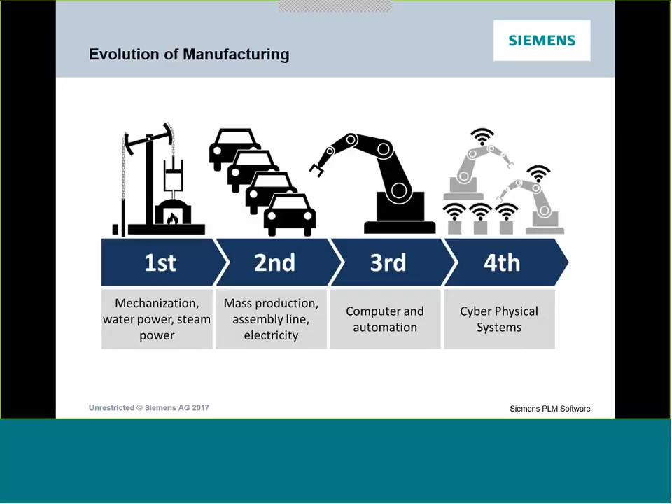This digital technology is leveling the playing field for businesses of all sizes, including small and medium-sized businesses, enabling them to disrupt their industries. It's creating opportunities to develop products and services that were once inconceivable. Size, which was once a competitive advantage, is becoming a liability as businesses that once dominated their markets are now struggling to keep up with young, nimble startups. This digital transformation is helping companies make their processes leaner, faster, and more flexible, enabling them to rapidly evolve to react to ever-changing market requirements and conditions.

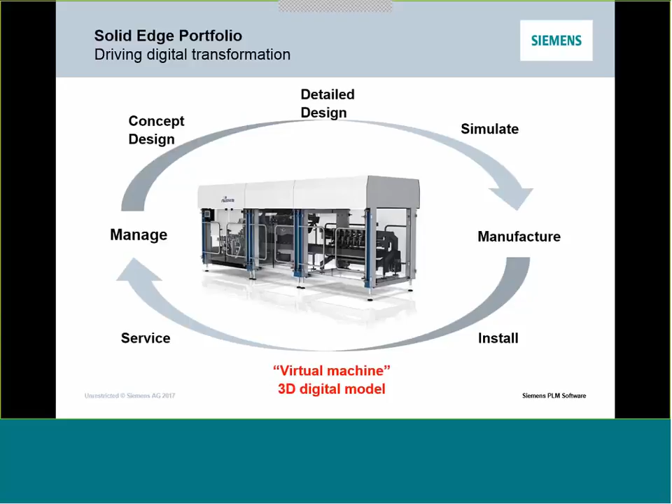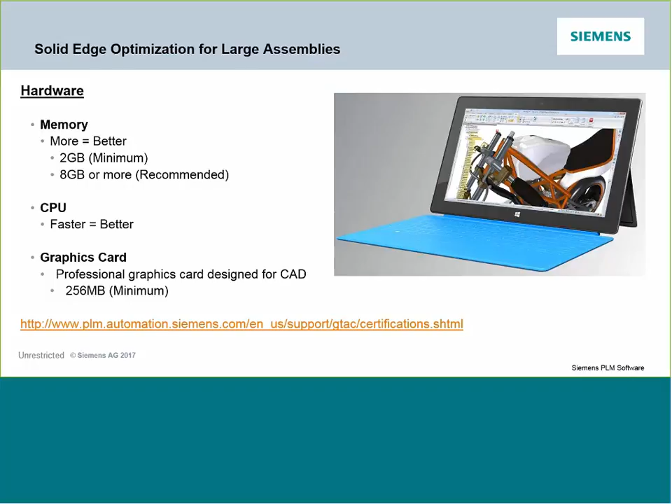Obviously, as you look here, the amount of memory you have is critically important. The more you have, the better, especially when working with larger assemblies. The faster your CPU, the better, and then also having a really good graphics card. The focus of the main demonstration is going to be talking about the ease of accessing the data that you want to work in, and that goes both for the assembly models themselves as well as the drawings.

We also want to talk about how you can work more efficiently with the tools that are built into Solid Edge, primarily by optimizing your display with built-in tools like display configurations, being able to utilize tools such as simplification, and then also things like zones where you want to work with inside of a spatial area.

Some other key things that will help you, which we won't go over too much in the demonstration itself, but being able to turn off some of the visual effects like reflections, shadows, and then changing some of the options in the View tab, such as controlling the sharpness of your display and how your views transition. And then we'll also talk a little bit about how you can maximize your memory usage by utilizing some tools such as unloading hidden parts and then inactivating parts that you're not currently working in.

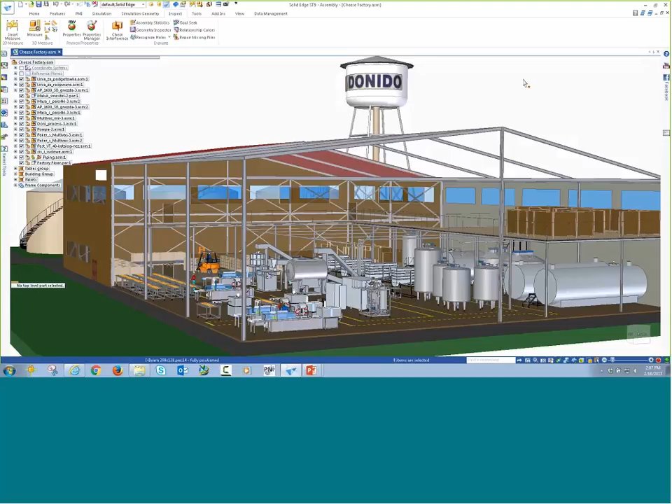With that, we're going to go into Solid Edge and talk about some of these tools. The specific assembly that we're working in, this is a plant layout, and you'll notice as I zoom out, we have a number of components here, both from the plant design as well as the shop floor. As I pull up the statistics of this particular assembly, it is about 12,500 components. And as you look here, some of the statistics that you see representing the count for the different components.

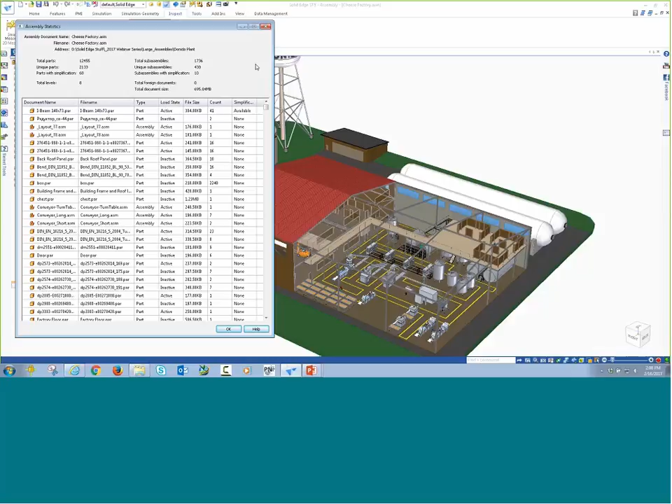But then you'll also notice that this particular assembly's total document size is just under 700 megabytes. So we are working with a very large assembly in this example. I also want to talk a little bit more about some of the built-in tools. We talked initially in the PowerPoint about accessing this data quickly. So one of the things I want to show you before we get into some of the ways that you can optimize your display is how you can access large assembly files very quickly.

So I'm going to open up this same plant layout file and show you a way that you can access it almost instantaneously. You'll notice inside of the Solid Edge options menu, we have some tools that allow the user to specify what exactly is a large assembly. So large assemblies to different customers can mean different things. It's basically a relative number.

You'll notice under the options for opening up the assembly, I can specify what represents a small assembly, in my case, 100 parts or less. A medium-sized assembly, 100 to 10,000. And then also here representing 10,000 or more components is what I deem a large assembly. And what that means is as we open up these large assemblies, we can specify some different criteria. For example, I may want to open up the assembly file itself, but not display any of the components. So you'll notice in this case I have the option for yes, for hide all the components. Again, I'll talk about the benefits of that here in just a minute.

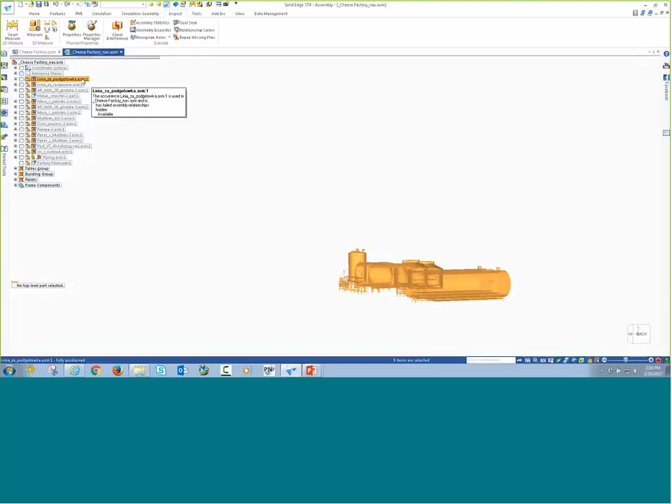When I access a large assembly file, you'll notice here that you have the ability right down here as one of the options to open the assembly as, in this case, large assembly. And you'll notice that it's going to open up this file almost instantaneously, even though we're accessing over 12,000 different components. One of the benefits that Solid Edge gives you is it gives you access to the structure of this particular assembly. And what you'll notice is as I hover my cursor around different components, it highlights exactly what components and where they are within that specific plant layout.

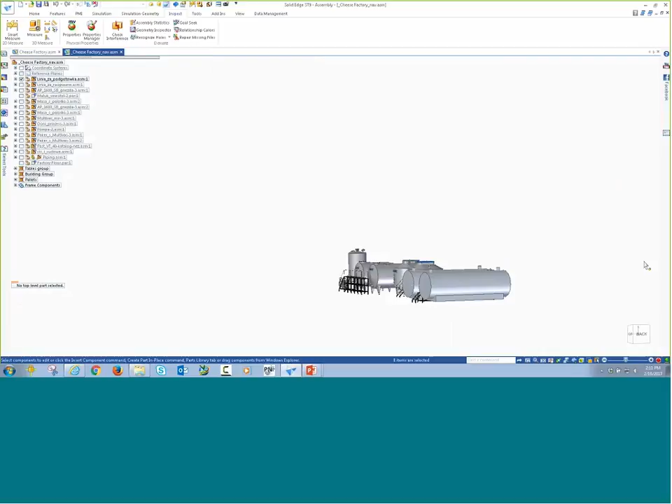So for example, if I know that I'm working within the specific area of this large assembly, I can highlight those components and choose just to show them. And that gives me access to those specific components where I don't have to sit and wait for all of the 12,000 components to load on screen. And I'm sure many of you who are on this call today have probably accessed a larger file at some point, hit File Open, and had to sit and wait for all of those components to load on screen.

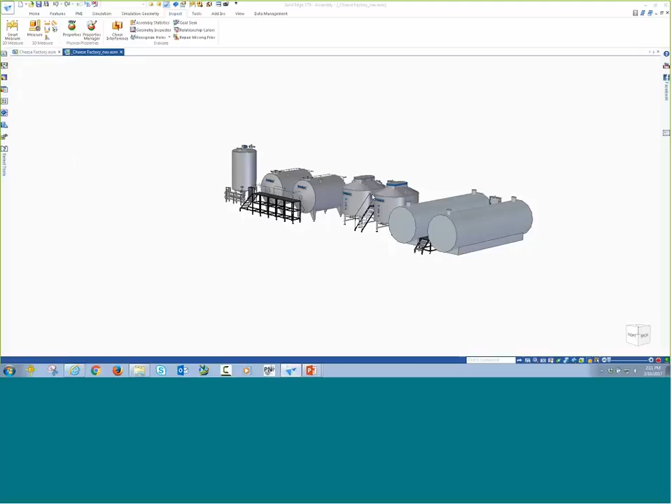This is one way that you can work more efficiently in gaining access into this large assembly. We'll go ahead and close this specific file down and go back into the previous assembly where all of the components are displayed.

I just want to talk a little bit about some of the built-in tools that allow you to work more efficiently by optimizing your display. Oftentimes when you're working within large assemblies such as this one, you don't really need to see many of the smaller components—nuts, bolts, washers, and maybe some other options. I may just want to focus in on some of the main machinery or other main components. We have built into Solid Edge a tool called Select Parts by Size.

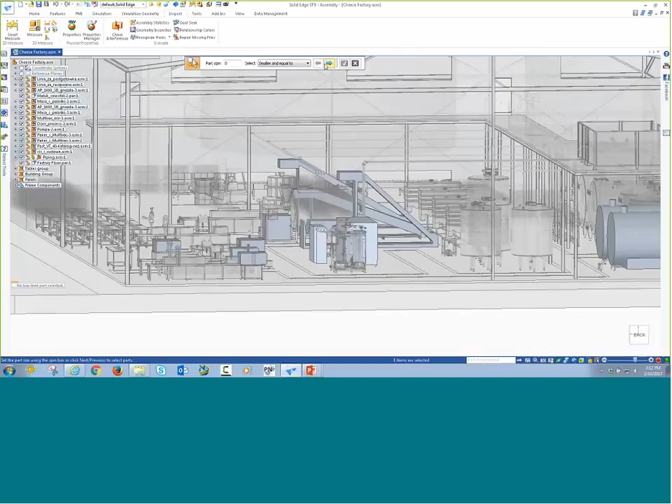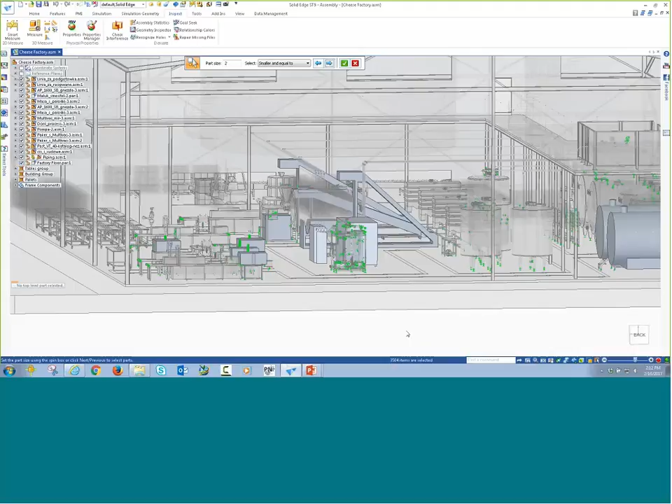With just a couple of clicks of the button, it's going to start accessing the parts based on their size. If you look closely, you'll see that we've got a number of smaller components highlighted in just a matter of seconds. If we look down here at the metrics, it shows that I've selected over 3,500 components in just a matter of seconds, and what I may want to do is just hide those.

Being able to select those very quickly and then hide them very quickly, I'll just do a right mouse click and choose to hide them from the screen. That way, that's going to increase performance as I'm working inside of a larger assembly.

We mentioned being able to access or maximize your memory usage. We also have a tool here that allows us to unload hidden parts. So those parts that I just hid, if I want to unload those from memory, that'll speed up other assembly tasks because those parts are no longer in memory. It gains me better efficiency as I'm working within the larger assembly because now those 3,500 components are no longer in memory.

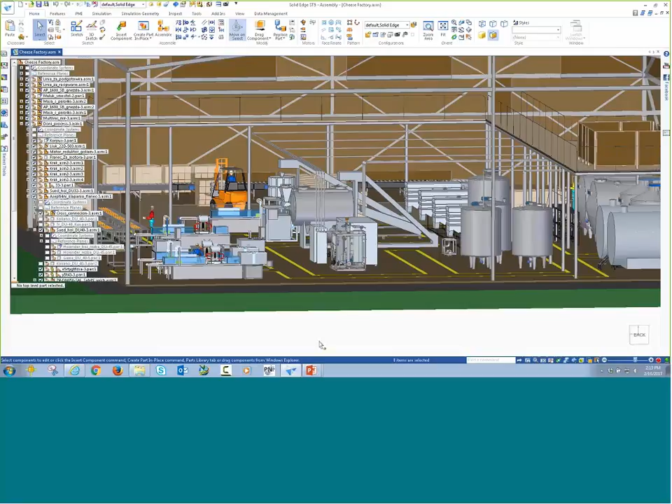Another way that you can maximize your display or increase your efficiencies is to utilize what we call display configurations. Obviously if I've been tasked to work within a certain area of this particular plant layout, I may have some other members of my team working on other areas. So we may be accessing this top level assembly and working within some of the different sub-levels, and I may just want to look at specific components.

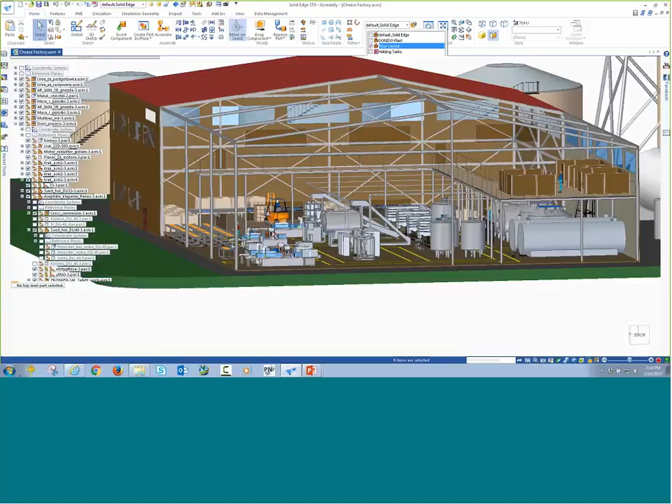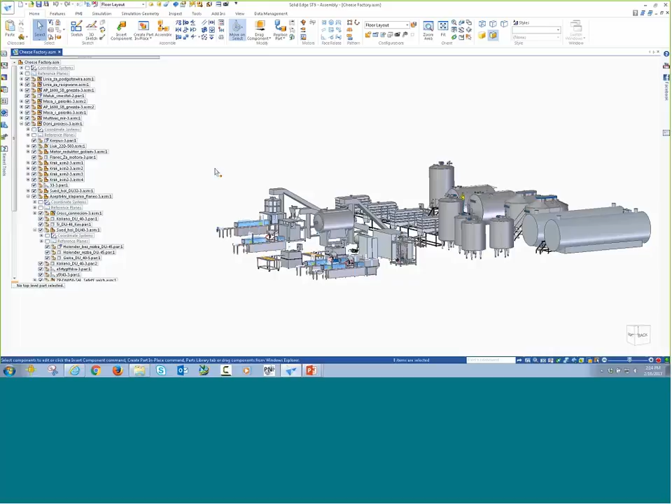I may want to just, in this example, look at the floor layout. This may just show some of the specific machinery while turning off the building structure, maybe the water towers on the outside, and allow me to just focus in on what I need to see. Display configurations allow you to focus in and create what we call saved views, giving me access to specific components without having to manually hide and show them on the left-hand side. I can save them and get access to them very, very easily.

As I zoom in on one of the areas of the floor layout, you'll notice that we have some machines represented in great detail, and others represented with a more simplified display. This is a way that you can optimize your display and gain efficiencies as you're working within these large assemblies, by creating what we call simplified versions of the assemblies.

Another nice little feature we have is being able to access where in the Pathfinder on the left-hand side a component might reside. Obviously, if we have 12,000 components listed on the left-hand side, it may become difficult to find exactly what I'm looking for.

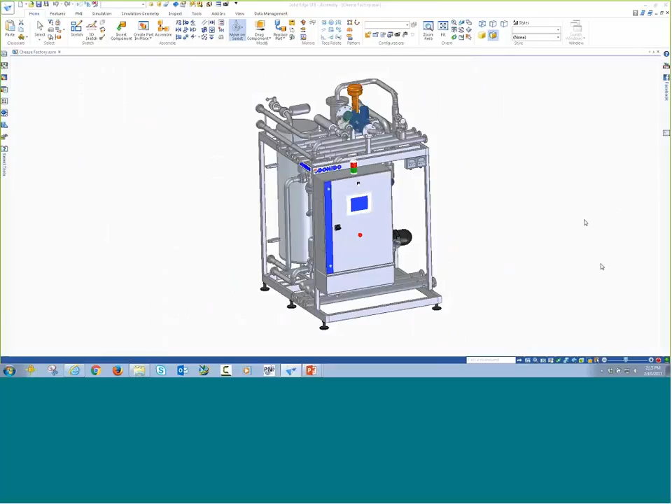As I select a part graphically, Solid Edge will automatically scroll to where that part resides in the Pathfinder. It'll highlight that component and show me the different levels, such as sub-assemblies that component resides in. In this case, I'm going to open up this particular sub-assembly and just show you some ways that you can create a more simplified version.

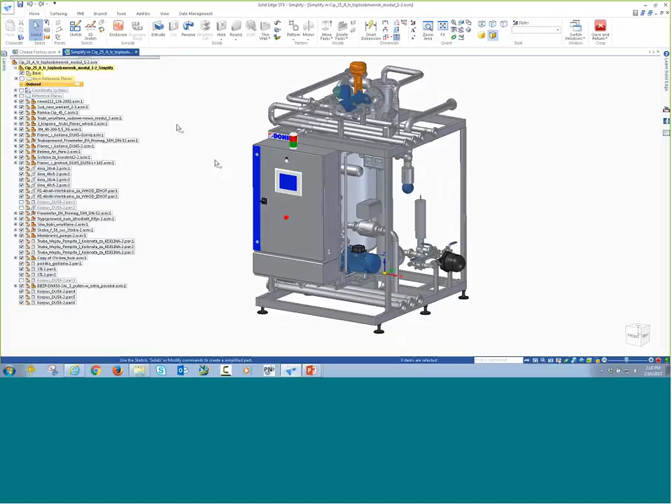You'll notice right now we are looking at the designed version. If I just tag it to simplify, this will gain me access to different tools that will allow me to very quickly create that simplified version. We have all of our modeling tools available, so you could choose to just model the shape of the simplified version of your assembly, or an even quicker method would be to utilize this tool called enclosure.

What enclosure allows me to do is to enclose the area that I specify, in this case with a box. I'll just specify the outer regions or the outer components, and Solid Edge will do the rest for me. It'll create a box around the outer extremities of the components that I selected.

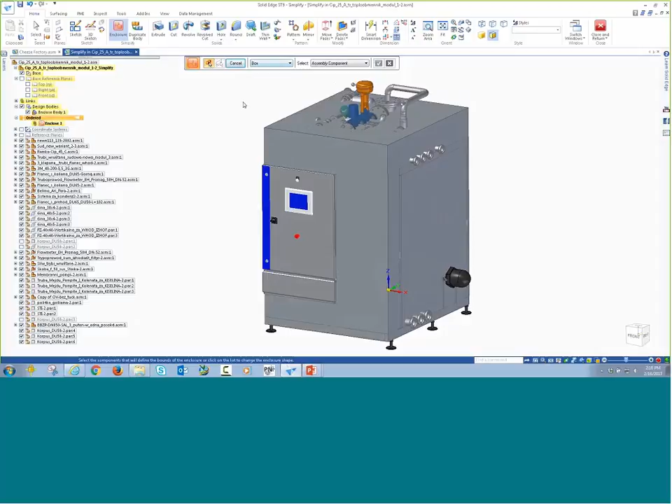Now we have the option for a box. We also have the option to do what we call a cylinder. So components that you see like this may be better represented as a cylinder, and Solid Edge again will model that for me automatically.

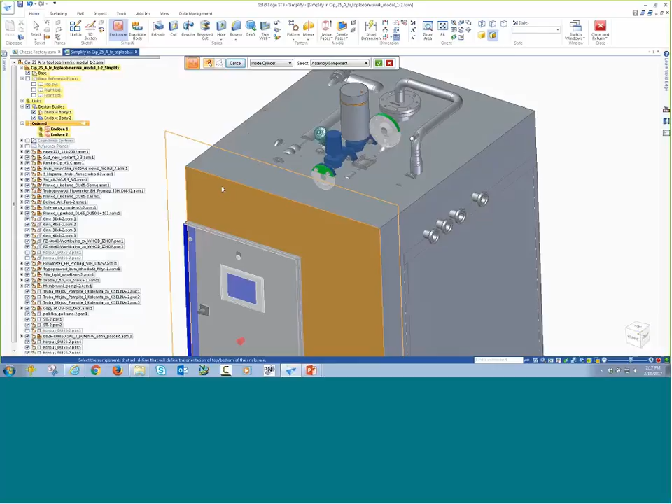I can also do the same task between multiple components. So for example, if I select two different components, Solid Edge will create a cylinder between those two areas and just simplify this area for me.

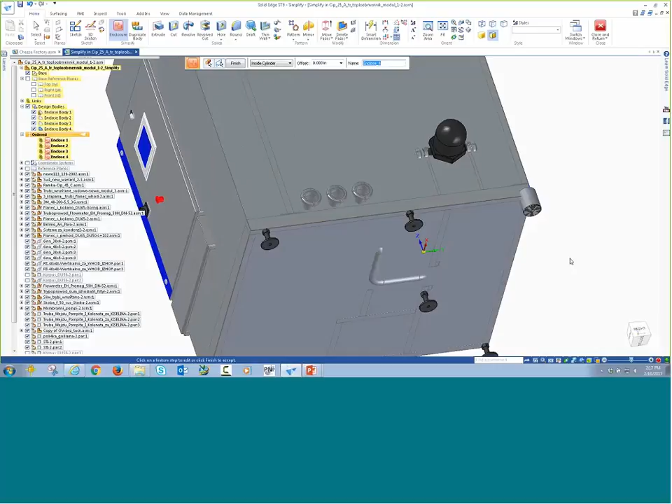If we look down here on the bottom of the machine, you'll see that we have several feet. In this case, we have about 7 different feet. I'm going to simplify one of these, and again, we'll let Solid Edge do the rest for us with the other 6 feet. We have a nice tool here called Duplicate Body. That'll allow me, if I've simplified one of those components, it'll go through and actually find all the rest of those for me, and then create the same simplified part on the rest of those, decreasing the amount of time that I have to work to create the simplified version.

For purposes of time, we won't do anything else to simplify this. I just wanted to show you a couple of the tools there that allow us to take a more detailed assembly and create a simplified version of that. So we'll go ahead and save that.

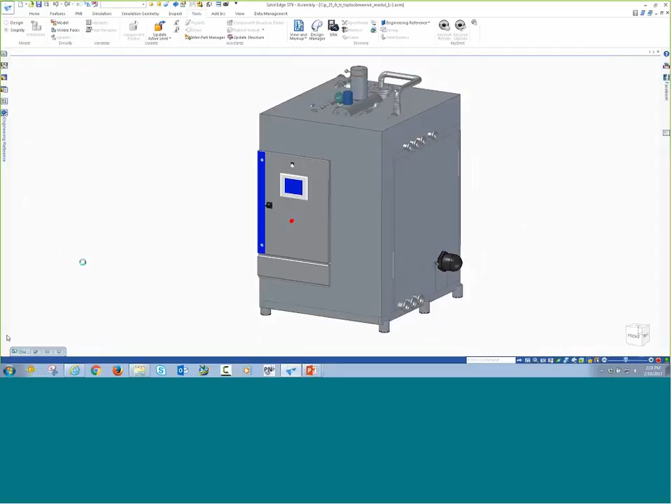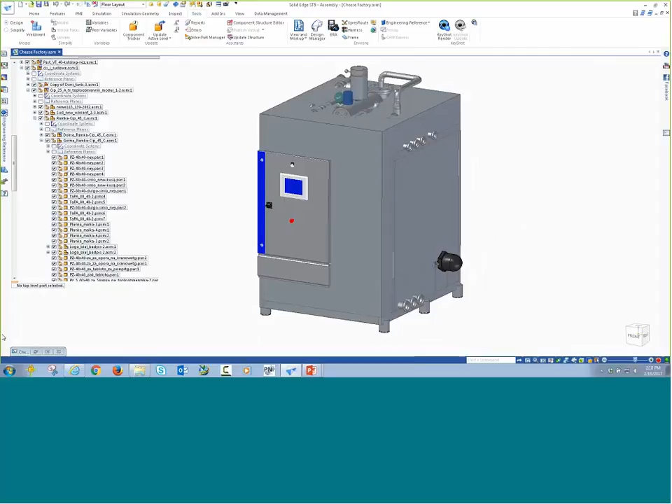As we come back out to the top level assembly, you'll see how we can access whether or not we want to display the simplified version or the designed version. This will take us back out to the top level assembly, and I'll show you in just a second or two how we can gain access to which version we would like to display.

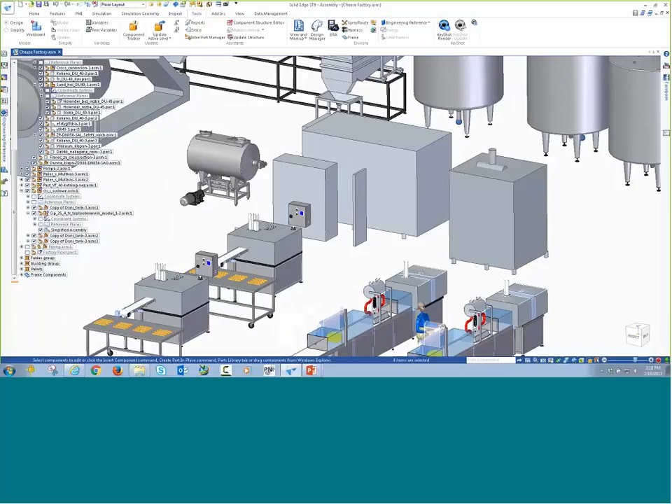Again, all I do is I come over here to where the subassembly resides, and just by simply doing a right mouse click, you'll see an option in your shortcut menu that allows you to say use simplified assembly or use designed. We'll tag the simplified version. Again, that'll show us what we just created, and it cleans up the display. We don't need to see all that detail, and it allows us to work a little bit more efficiently within this larger assembly. And we talked a little bit about display configurations earlier.

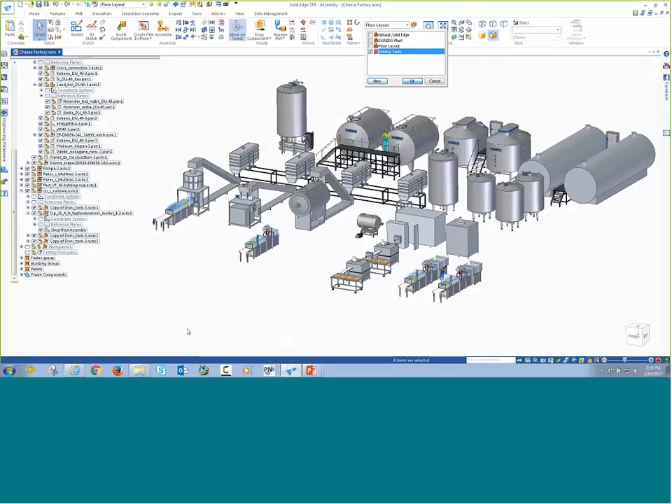Display configurations, as I mentioned, is just a way that you can show and hide specific components and save that view so that you can get back to that view at any point in time. If you look in the display configurations, the symbol here for holding tanks looks just a little bit different. This is what we call a zone. A zone is very similar to a display configuration, but it's based on spatial area versus just components that are hidden or shown. I'm going to show you in this example the holding tanks zone, and it's only showing different components that reside within that spatial area.

I'll show you with a box what that zone looks like. So again, another way that you can access different components, if you maybe work within a specific area of a larger assembly, is you can create a zone, and you can also open up the assembly based off of a zone. Very similar to what I did when I hid all the components initially. I can open it up based off of a zone and get access to this file much quicker.

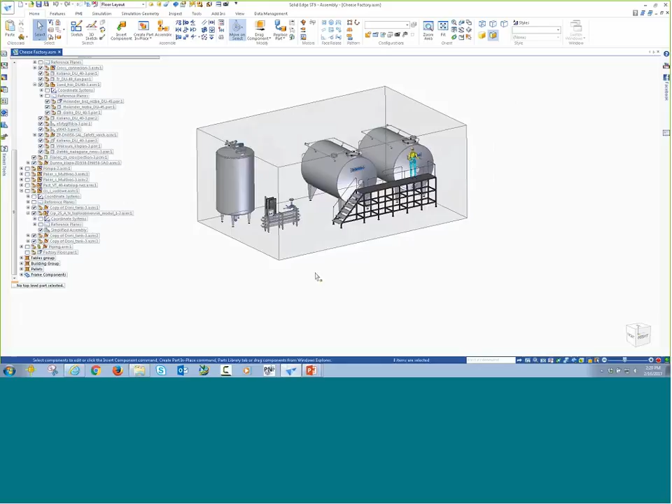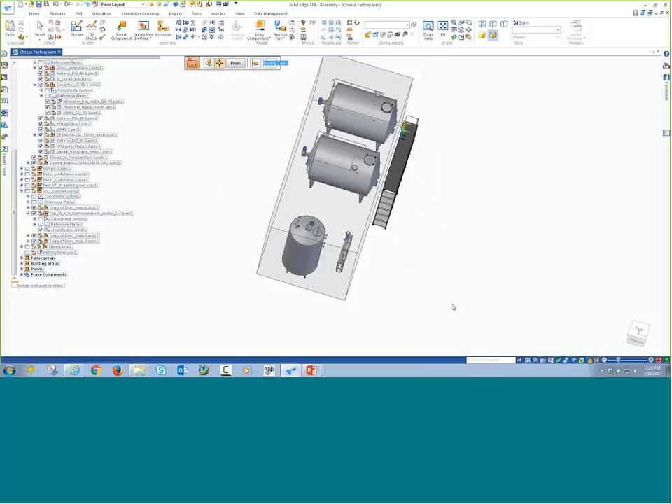Just to show you a real quick example, you can modify the spatial area that you're working in. If I select the zone itself, you'll notice that it's showing all the components inside of that zone. If I want to modify that, I can simply just pick on any one of these zone faces. In this case, maybe I'll push that front face in just a little bit. What you'll notice here, now the stairs and the person standing on those stairs are outside of the zone, so as soon as I click Show Components, it'll turn off the display of those specific files because they no longer reside inside of that zone.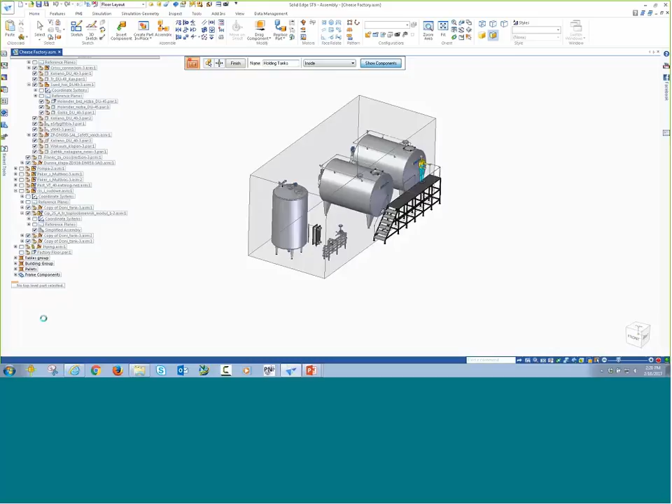Zones are also dynamic, so as you're working and modifying your assemblies, if you add additional components inside of this spatial area, they automatically get added to the zone. Or if you move components outside of this spatial area, they automatically get removed from the zone. So it's just a quick way to show components based off of spatial area, making you very efficient.

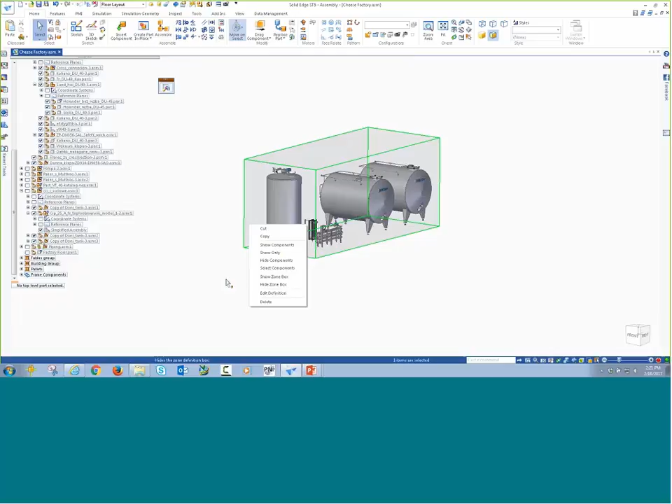Since we're working within a large assembly that contains over 12,000 parts, sometimes you may need to find components based off property information. We have a nice tool here called queries. I may want to create a query and find all of the components that are in our packaging area.

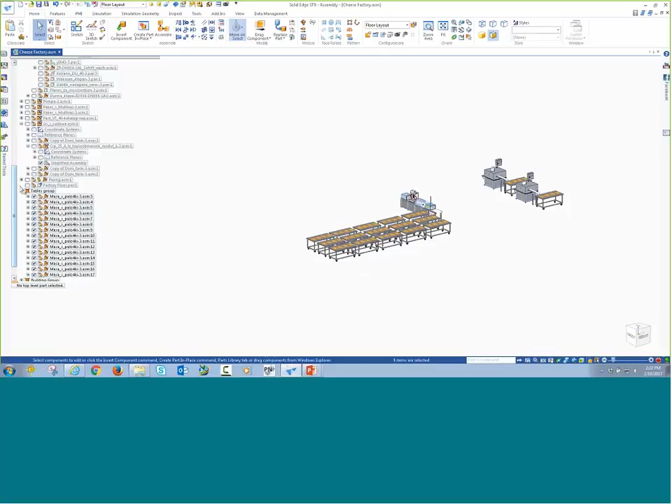So we'll create a query and find anything that has packaging in the category. That'll create that here. I simply double click on the query, and it'll show me graphically which components those represent. I'll do a show only to display only the components inside the packaging area. I'll also turn on the factory floor so we can get a better feel for where all these components reside.

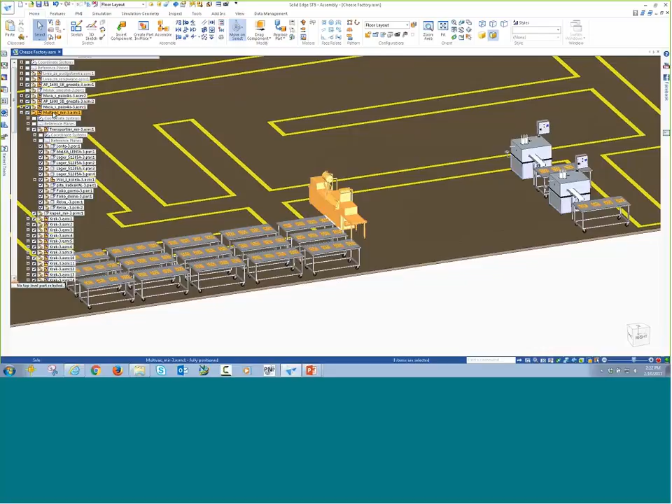Some other tools that are really nice within the assembly environment, besides assembling parts together, is being able to replicate components and find where components reside inside the Pathfinder very easily, and how Solid Edge will scroll to those. I also want to show you this handy tool called our steering wheel, which allows us to either manipulate the position of a component or replicate parts very easily.

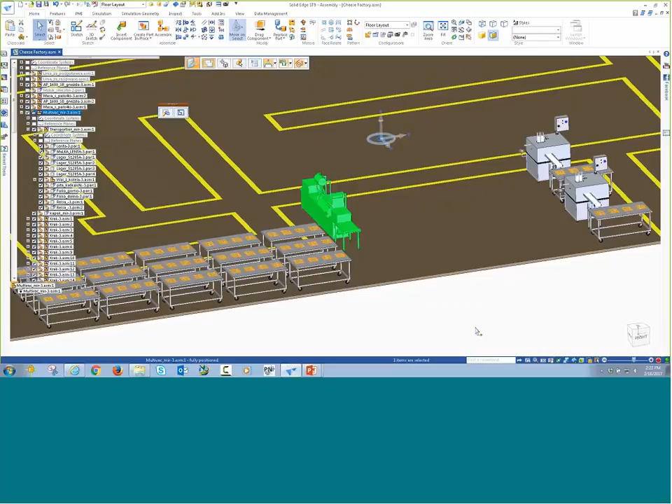As soon as I select a component, you'll notice up here in the top portion of the menu bar we can select to copy that machine. As I'm trying to lay out all the different components within the shop floor, I may want to replicate this machine multiple times. I simply hit copy, then choose which direction I want to copy that machine. Very quickly I can grab an entire machine and create a copy of it.

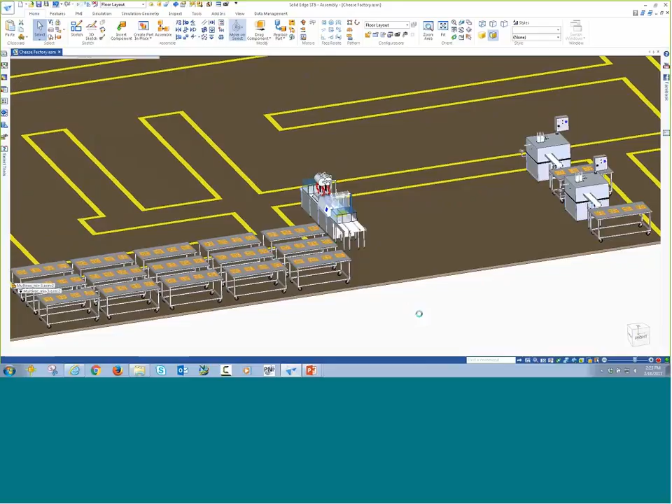I can key in values to specify exactly where that machine is going to go. In this case, the number that I typed in was a little too small. I may want to redo that and copy it a little further out.

So again, let's go through. We'll grab that machine. Missed a 0 on that — I typed in 200 versus 2,000. Just to show you how easy it is, we'll select that we want to copy in this direction, and this time type in the appropriate number: 2,000 millimeters towards the right. We can do that several times.

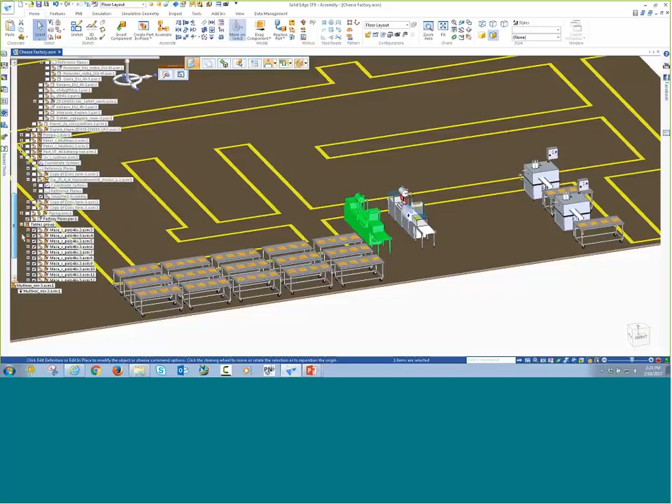Maybe I want to copy both of those and get 4 of these total. So I may want to select the one that's selected now, but also grab this first one as well. We'll select both of those, utilize the same steering wheel tool, and copy those out. Now we'll create 2 additional machines, and that'll fill up that space a little bit better.

I can also take any of these machines and manipulate them, as I mentioned earlier. Maybe this one here on the end, maybe I want to push this out. I can just move it versus copying it — maybe move it out 4,000 millimeters, and then rotate it into position. Instead of using the directional arrows, I may select the steering wheel itself and rotate it out 90 degrees. We can go through and position this very easily without having to use assembly relationships.

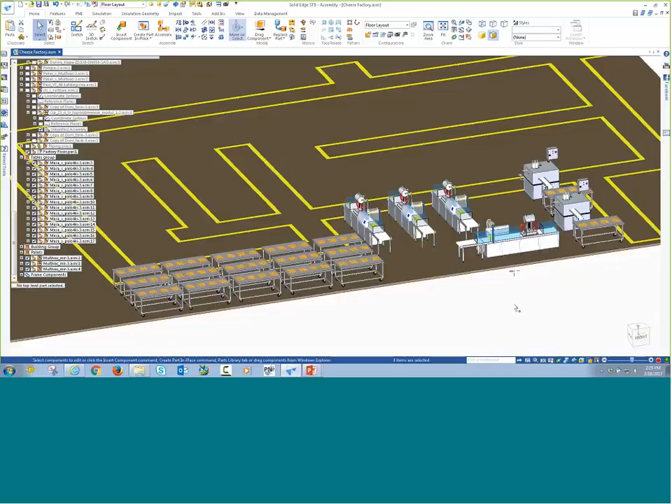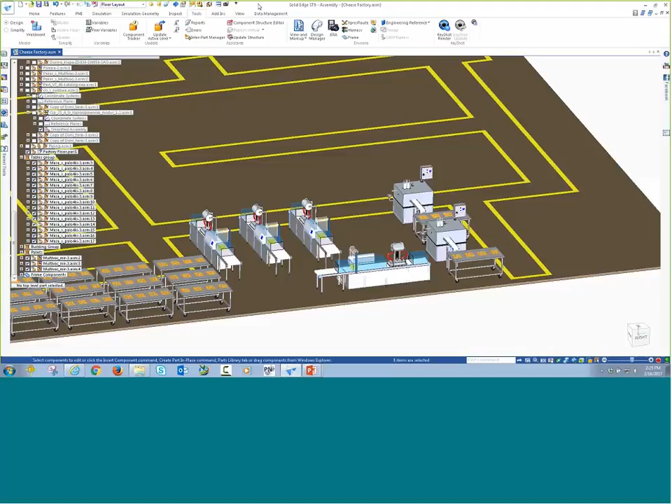One thing we may also want to do, as I mentioned earlier, we may have several team members working inside of this plant layout. Often as you have multiple people working on the same file or within sub-assemblies related to the same top-level assembly file, you may want to limit exactly when a file gets saved or updated. Solid Edge has nice tools that allow you to specify whether or not you want an assembly updated automatically when somebody else makes a change, with controls for updating the assembly as well as saving it.

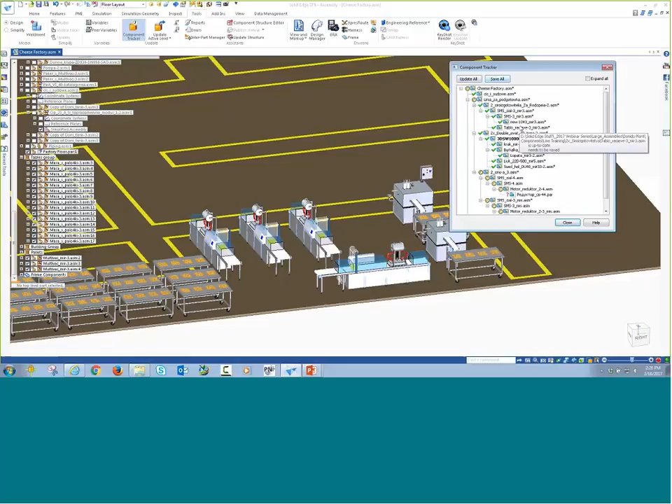We also have a nice component tracker where when files get changed — maybe my team member's working on a different area while I'm working in the top-level assembly — I can check and see which assemblies or components are out of date. I may want to go through and see which ones are out of date and choose myself whether to update or save those components with this handy component tracker.

So we've talked about the 3D assembly. I also want to show you some tools that are available when you're working with large draft files. And you'll see here as I open up the draft document of this factory, when I click on the file itself, again, just to show you the size, this is a 70 megabyte draft file.

And just like I showed earlier, gaining access to the 3D model very quickly, we also have a tool called Inactive Drawing Views so that I can open up this large draft file in a review state. And again, just like with the 3D model, I can open up this large assembly drawing very, very quickly. It's almost instantaneous from selecting the open button.

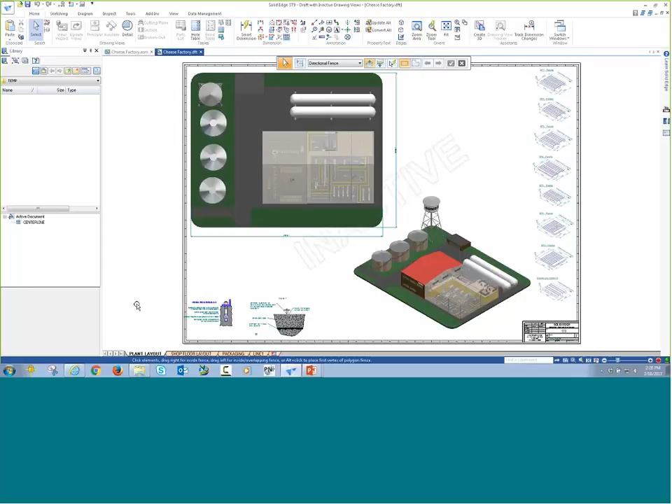So you'll see on the first page, I have a page that shows the entire plant layout. Maybe I have a couple of other pages, maybe showing the shop floor layout, or maybe specifically one of the individual lines. And even though these views are inactive, I can still do things like place dimensions on the views. Maybe I need to get a distance between these two machines. And I can go through and place dimensions on the views and get some information out without having to load all of these views into memory.

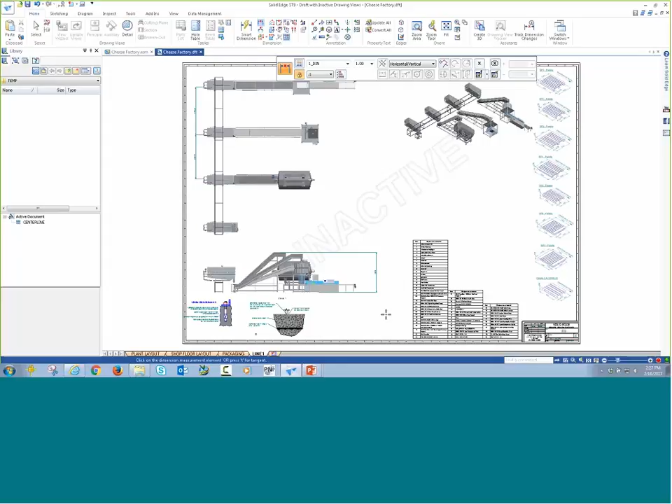So again, it allows me to open up the files quickly, still do some work that I need to do, but I don't have to, once again, wait for the views to load into memory and wait for the file to open.

I want to show you another example here of opening up an even larger assembly, and for purposes of time, we'll go through this relatively quickly. But this particular assembly that you're about to see has over 2 million components. So again, Solid Edge does a really good job of working with these large assemblies. This document size is extremely large. And again, as I mentioned, it has over 2 million components, but it's basically a cruise ship built to scale.

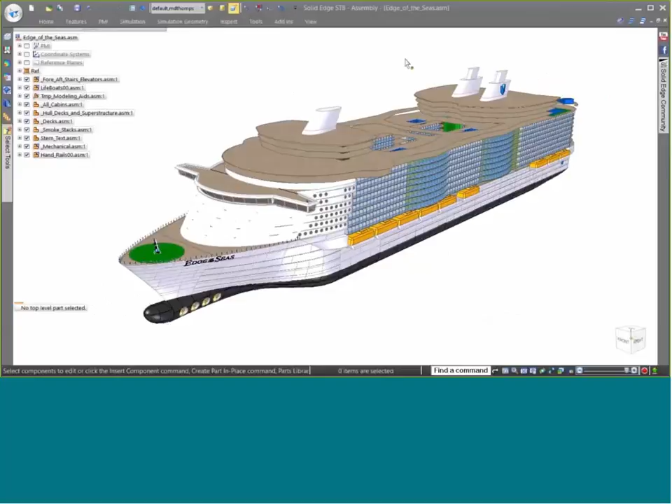And you can see if you utilize the different tools that we talked about here in this webinar, you can work with extremely large assembly files. As you can see here, the performance is really good in terms of view manipulation and being able to work within different areas of the assembly itself.

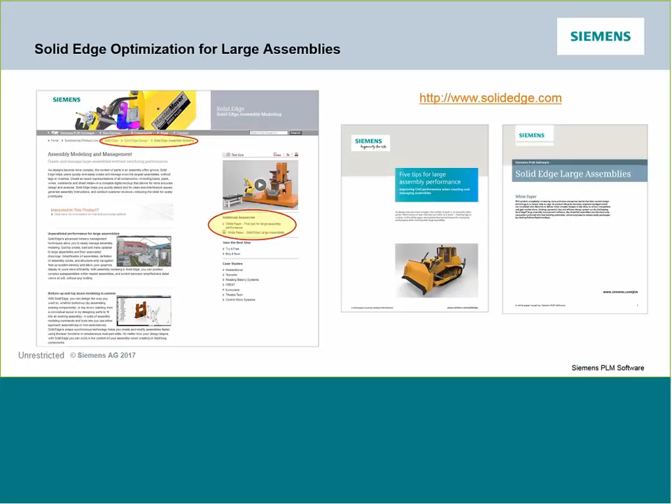Okay, thanks Kevin. Certainly some really great techniques there for working with really large assembly files and large draft files as well. So thanks a lot for that, Kevin.